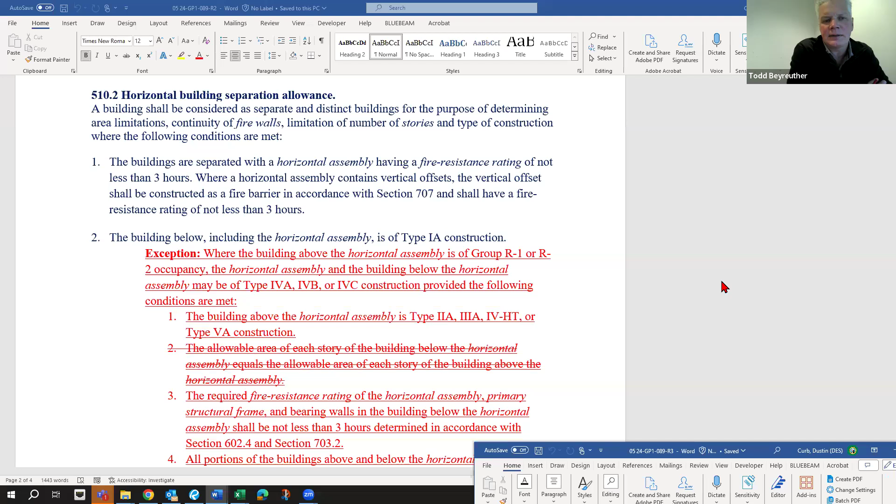So this one, if you remember, is the horizontal separation for considering mass timber podium, including the horizontal assembly. It started with type 4A, and then seeking feedback and conversation to help shape it. This version right here before the weekend was keeping open type 4A, 4B, and 4C. I think there was pretty strong opposition

against the B and the C consideration. The one that Dustin, if you have the revision, I just want to point out, the one we've been working on is 4A, and I'll just give my opinion. This is my subject matter expertise, this is all based on obviously the ad hoc Tallwood Building committee in 2015. We have the advantage of having at least one member that joins these meetings frequently.

The original fire testing was done with the old standard requirements that allowed heat delaminating resins in the polyurethanes. Part of the outcome of the 2015 testing that led to the 2021 code revisions was also to change the standard to require a non-heat delaminating resin.

There were additional questions, and we need as many data points as possible, still need more in fire. So there was additional testing in the last couple of years in Sweden called RISE. The changes that are part of the 2024 code, which we as state of Washington adopted in 2021 for type 4B, more exposure unprotected areas, were the result primarily of that testing.

This raises a further question: going beyond that, what if we allow some mass timber typologies in the podiums of the lower building, in what we call a horizontal separation of 510.2? Some changes to consider when this gets posted and discussed Thursday are whether this was a good recommendation, making it its own separate section rather than putting a bunch of exceptions into section 510.2.

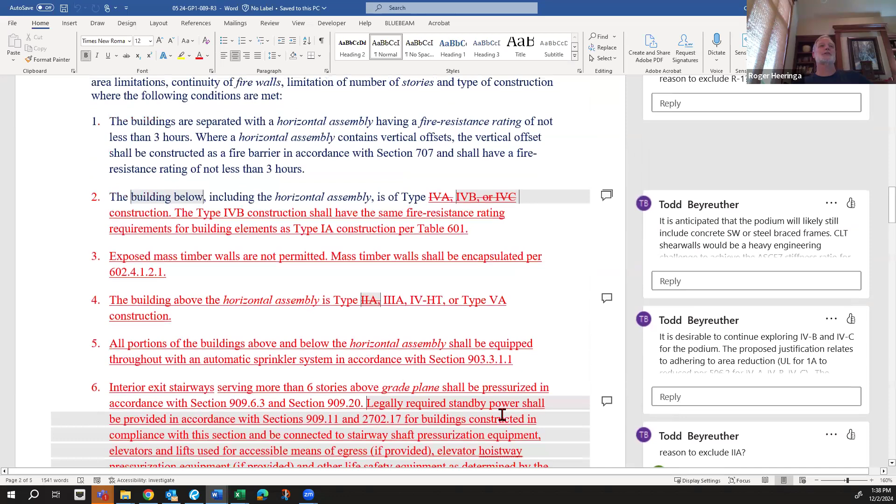So in the last proposal? Yeah, that's from the last. Okay, and I don't know that we've talked much about it. I don't remember. So I think that should be correlating - if we just did what was number 1, whatever the number was that we just passed, is there a correlation so that the description you have in number 6 corresponds to that? But that's all my comments.

Okay. John, you're perfect to go next. Thanks. Thank you.

As Todd mentioned, there was a group of us that met and sent some feedback to Todd and Joe just before the weekend. To summarize real quickly, the group that met included City of Seattle, myself, and one other person - I can't remember, there may have been one other person involved. Anyway, a couple other people.

But we were really concerned about extending this to type 4B and 4C. It's good to see that 4C is off the table, but we still have concerns about extending it to 4B. Understanding that some of the testing - I'll have to admit I have not had the chance to go through all the testing, like reading the RISE report in particular - I haven't had a chance to evaluate it all. But we felt 4A was pretty clear that was going to be okay.

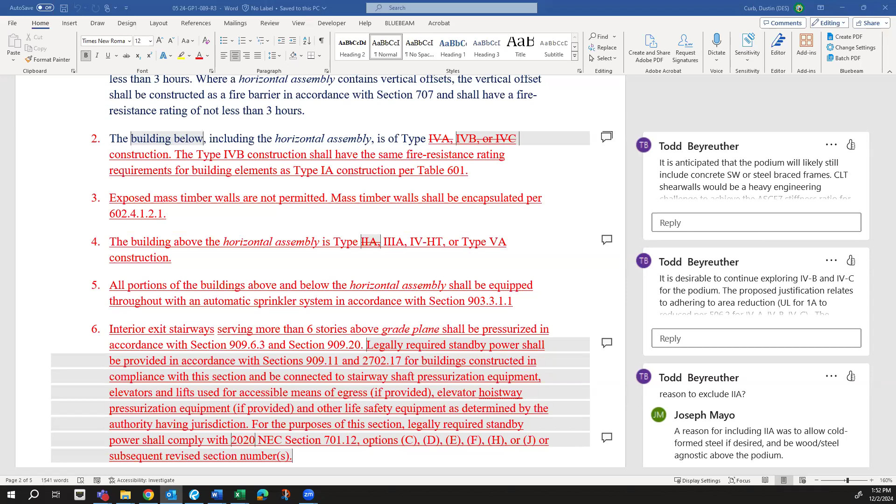Just in summary, this is essentially proposing mass timber floors and columns, no walls. It's recognized that most exterior walls and shear walls are not combustible. You still have to achieve the structural requirements, that would be an ASCE 7. So it's really going to, in my opinion, probably push it to concrete shear walls anyway.

But Joe, is there anything last? And then we probably should move on. Yeah, I think just highlighting that it is different than the other code proposal with limiting it to 85 feet or lower for the entire building, podium plus building on top. And then maybe just a bit of reflection that this is for Washington State, where we are in a mass timber ecosystem and one of the most advanced mass timber locations in North America. So it is in some way appropriate for this as a discussion, and that's part of the reason for bringing it up. I really appreciate all the discussion, so thank you for that.

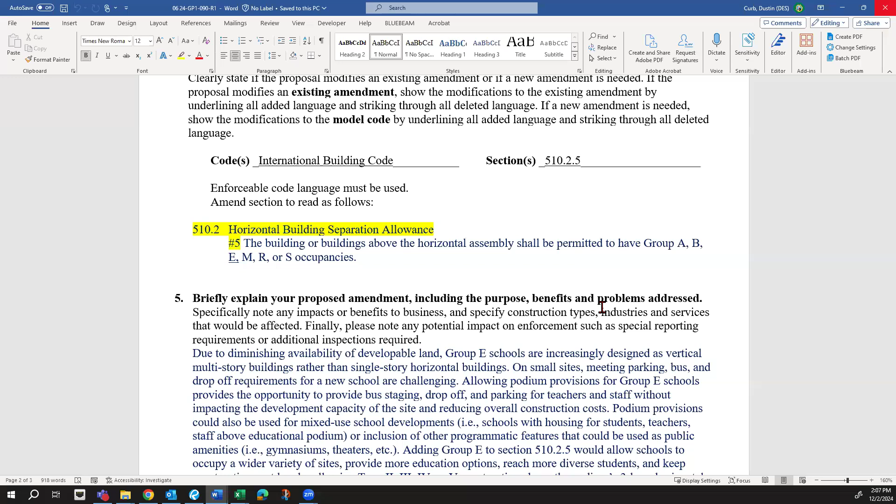So with that, I'll second, or let Joe withdraw. Thanks, Tim. I would appreciate it if you have time to send over some notes. I'd love to hear your thoughts on that to think about it more, but I don't think we need to further this one at this time.

So Joe, which would you prefer, to withdraw it or to vote? I'll withdraw it, yeah. Okay, Dustin, thank you, Joe. Is that appropriate, Dustin? Yes, sir. Okay, so instead of voting on the denial, we'll consider petition 090 withdrawn by the proponent. Thank you for that, Joe, and thank you, everyone.

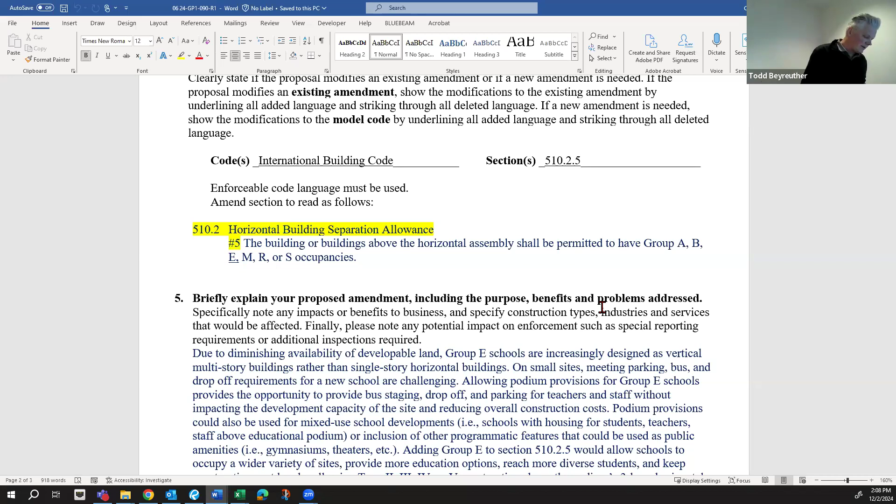Agenda item 7 is petition 115. We left this one from last week? I believe so. Let me check. Or was that further back? It might be further back.

I designed today's agenda to hit ones we haven't gone through very well. I try to put the ones we'll have a long conversation on towards the end, after ones we hadn't done already, and organize them so they flow through the text from beginning to end. So looking at our last meeting, let me get to it real quick. Does anyone remember? I thought maybe I'm just not remembering taking action on it.

I definitely remember. Todd, this is Eric, I can give a recap of what I know. Okay, thank you, Eric, that'd be great.

So a couple meetings ago at the building code tag, this was referred to the mechanical code tag. The mechanical code tag did review the language and moved it back to the building code tag without any recommended changes. I can't remember the exact motion made, but there were no changes, and they deferred final approval to the building code tag because it's under that committee at the ICC level. They did recommend including the same language in the mechanical code and the building code because they are duplicated sections in both codes.

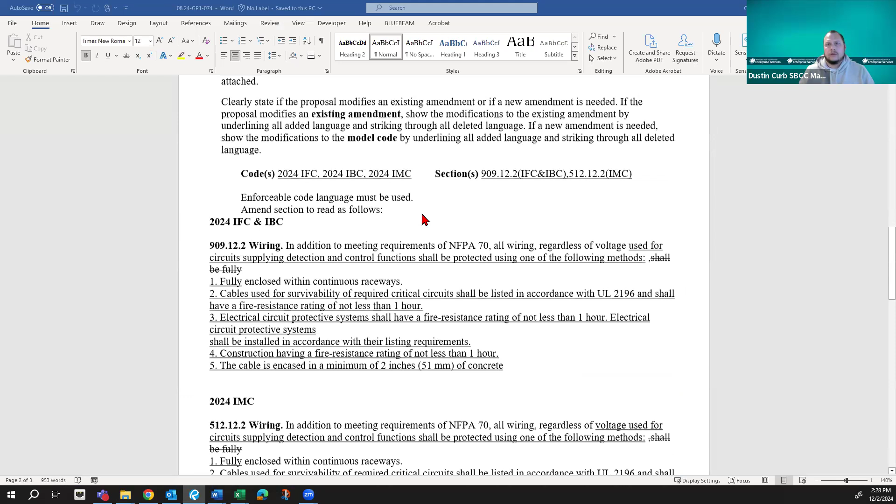All right, here's 074. What was this one? This one is David Mao. And this one is Dave here today. Nope, this one came back from the correlation committee as well. Let me get to my notes on that.

So it looks like at the November 19th correlation meeting, this one was reviewed, and the work group was okay with the proposal language and did not have any suggested revisions. So this one was heard by this group. Let me pull that note up. We did, I believe, hear this one once before sending it out to the correlation group.

Like Dustin, did you say you're pulling up? Yeah, I was just looking to see. We first discussed this one October 24th and deferred it to the correlation meeting to see if there's anything else to come out of it. So correlation group reviewed it on the 19th and didn't make any changes, and so we're back here with no modifications to what we've seen in the past on this one.

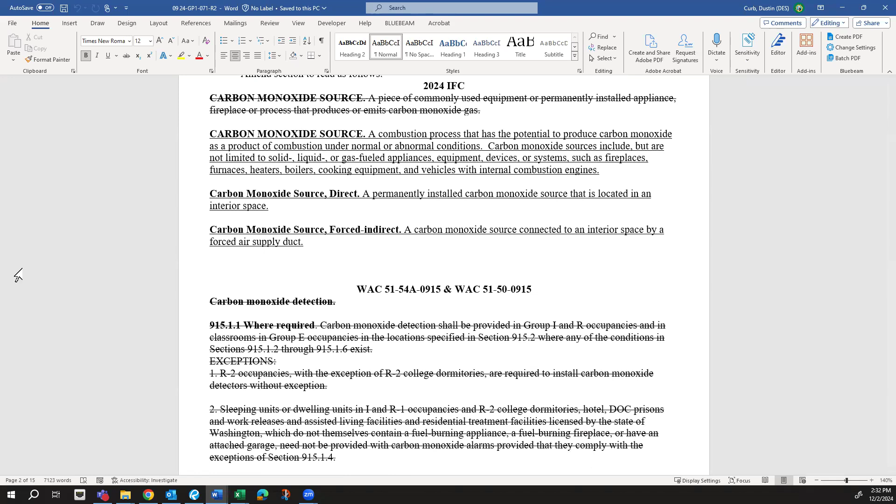Yeah, go ahead, Hoyt. This is just real quick. One of the things is 915.1. It says new and existing buildings shall be provided. Is this also in the existing building code?

That I do not know. Because usually I thought this, unless I'm in the wrong section. Am I in the fire? Oh, I'm in the IFC. Never mind. I wonder, yeah, that's probably why. Never mind. I'm sorry, I was in the wrong one. Forget what I was saying. If the IFC, if the fire code's written that way, then that's fine.

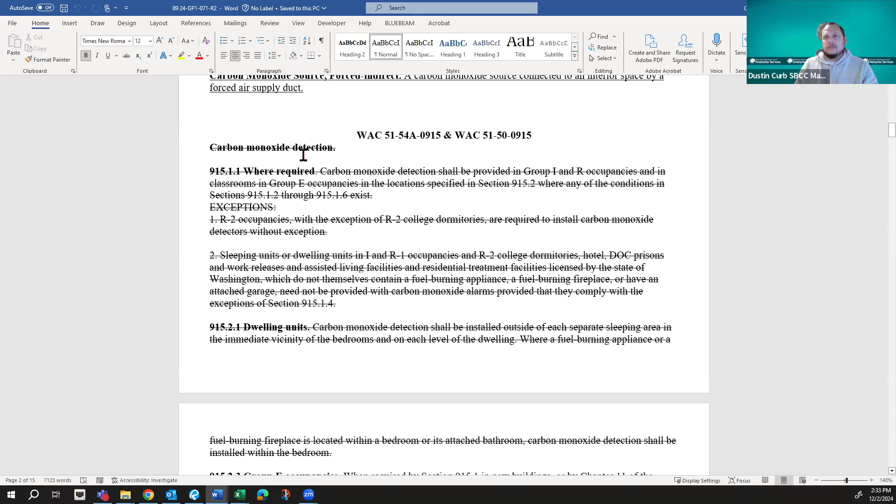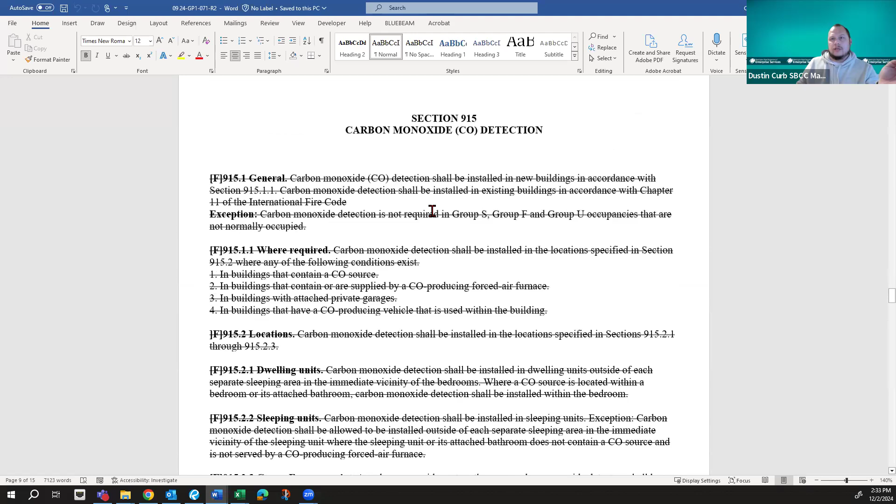Yeah, the only thing is when I look at 915.1, where it says new and existing buildings, all I'm concerned about, if you're in the IEBC, will you still get here? If the fire code's catching it, then that's fine. But typically, in my experience, a lot of times they use the full existing building code, and sometimes they're able to not get to this section. Maybe someone else knows off the top of their head.

That was something I didn't get to review this one, I apologize, I didn't have time. But as long as you're definitely going to get to this somehow, then that's fine. And it's in parentheses fire, so it's probably just through the fire in the fire code. But does anyone else know on this call if you're going to get that for sure too in existing buildings?

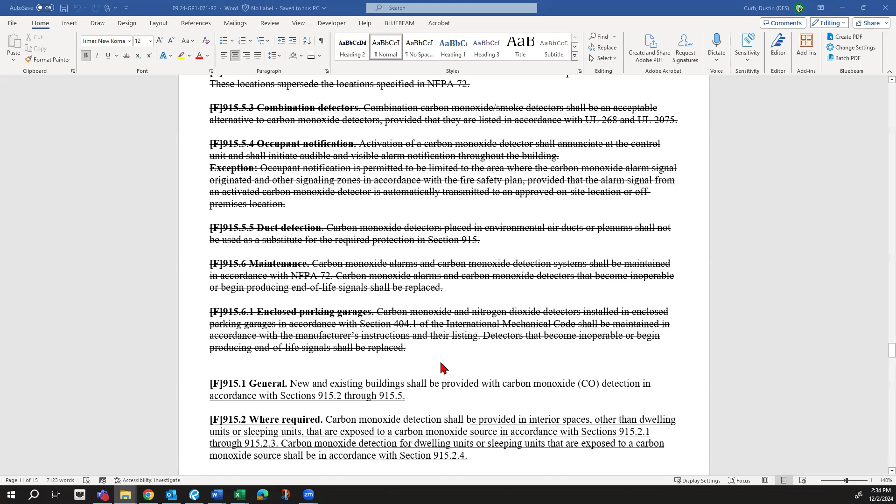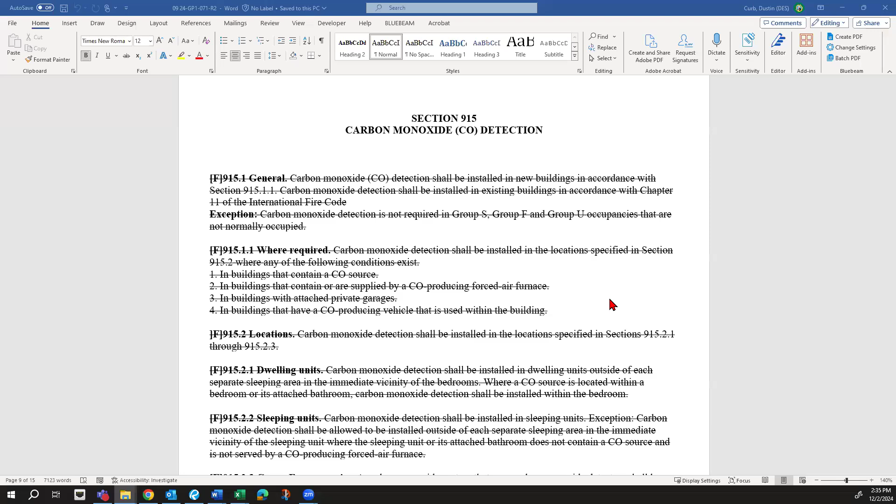Go ahead, Tim. Dustin, do you mind scrolling up to the strikeout for the IBC for 915.1? Yes. And then what that's replaced with in the IBC, not the IFC. This one here.

So there is that change that Hoyt is mentioning. The original code is for new buildings. I don't see really a problem with the language. I'd just say that the pointer from the existing building code will usually point you here when you have to be in compliance with the IBC for life safety systems. So you would go here and then it would have this new and existing buildings. But this wouldn't be the charging language ever to get you from the EBC to the IBC, so I don't think there should be a correlation problem.

And that's fine, that's fine. I just wanted to ask that question because I actually did not review this one, I apologize, so I'm doing this on the fly. Jon? Yeah, somewhat related to what Hoyt and Tim were talking about — does anyone else read this as being a retroactive provision?

Because I think relevant to what they're saying, the IEBC has triggers - when do you trigger new work versus other work. The way this is written, and the reason I think the original language referred to Chapter 11 of the IFC, is because that's where the retroactive provisions show up. So if you have a building and you want something retroactive, you throw it in the IFC anyway. This here appears to make it the building official's retroactive requirement, so anytime it comes to them, you force the work. That's kind of the way I read it, but others may read it differently.

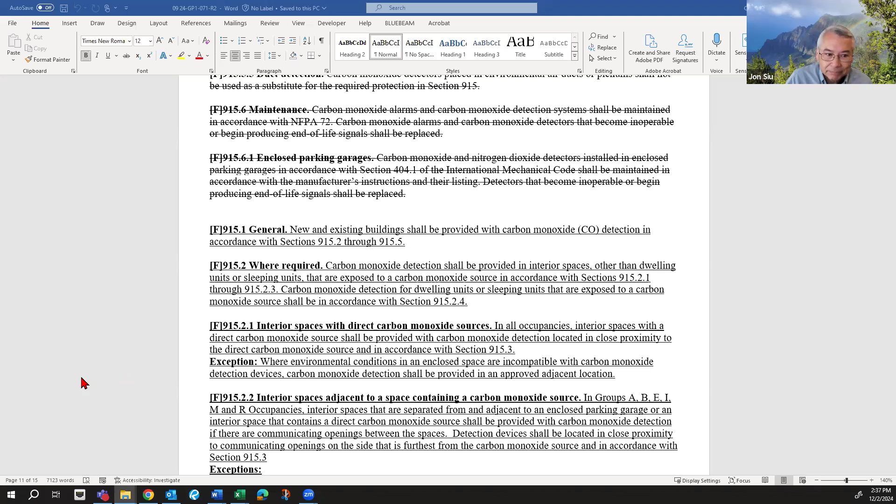Okay, Micah? I read it the same way, Jon, as a retroactive item. This is a really quick review of the IEBC, but I'm not even seeing, under level 3 alteration, that it triggers to this section either. So I agree with you, that's a retroactive item and that should be changed.

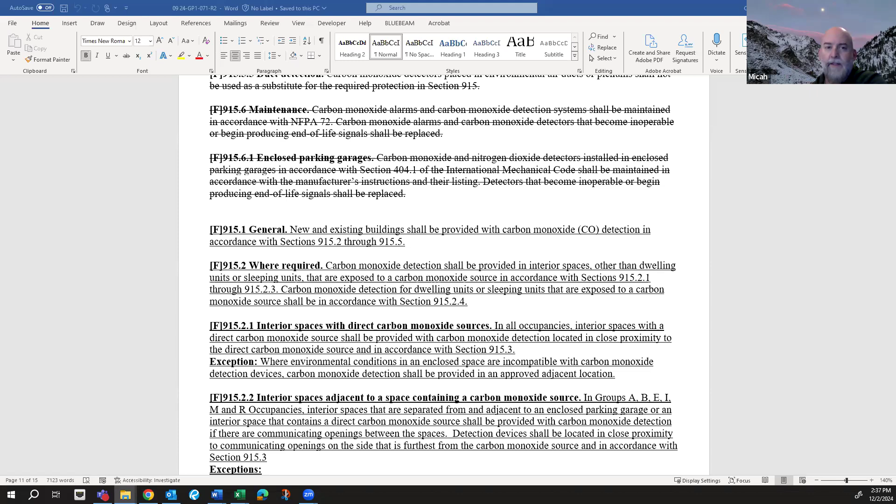The other thing I had a concern with, and again I had really short notice to look at this, is under the definition - Dustin, if you wouldn't mind scrolling up - it talks about the carbon monoxide source definition as product of combustion under normal or abnormal conditions. Would there be any other conditions besides those two? Wouldn't it just be a product of combustion? That seems like a strange addition to a definition - what does that mean? My recommendation would be to strike 'under normal, abnormal conditions' from the definition; you'd still get an accurate definition. But again, this isn't my proposal, and Ken's not here for me to ask him. I can probably send him a message though.

Yeah, go ahead Mike. Thank you, Micah. Yeah, I'm having some of the same concerns, and I'm not exactly sure why they struck everything and then redid it - it makes the review of the entire package a little difficult. I don't know what I'm missing here, but I feel like something is off, maybe that's just me in the way I write or read this. But I'm also seeing things like what Micah brought up, the normal and abnormal conditions - we need carbon monoxide detection not just when there's sources and fixtures and gas appliances, but when somebody drags their charcoal grill into their house to add some heat. I apologize because I haven't spent the time necessary to really review this side by side, but I think there are some concerns there.

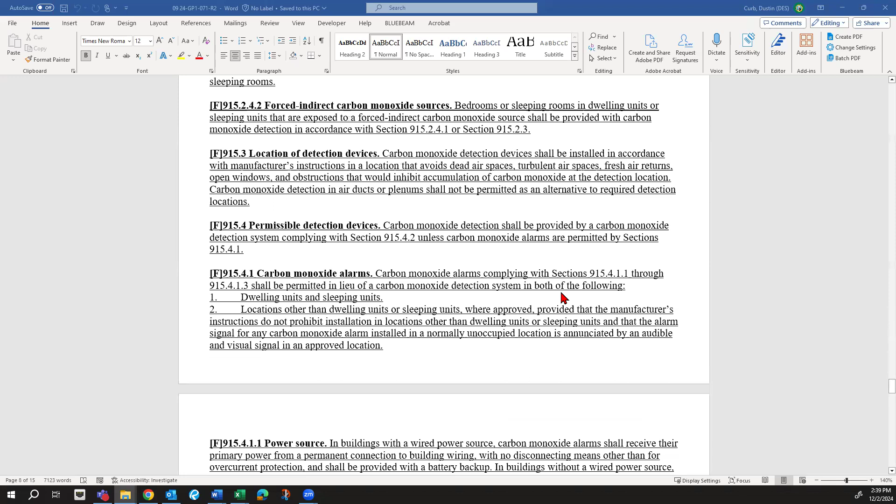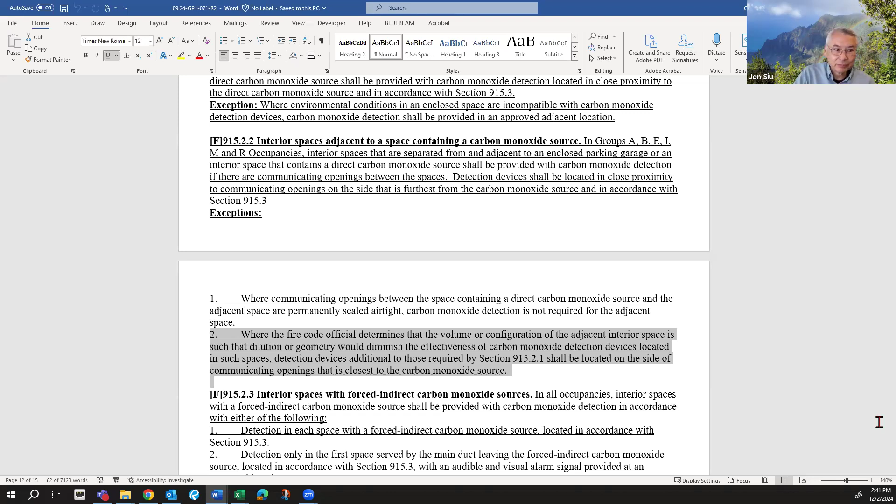Go ahead, Jon. Sorry, one more additional question for Ken when he comes back and you guys discuss this again - if you look at 915.2.2 on the building code side, there's exception 2. This essentially says it's something the fire code official decides, not the building code official - so who's got the authority? Should this just be in the fire code? It seems weird to say you have to go ask the fire code official what they decide on this particular issue. I agree, that does seem strange, Jon, especially when you look at the hierarchy of the codes - except for safety or the more strict, the fire code official usually has the last word.

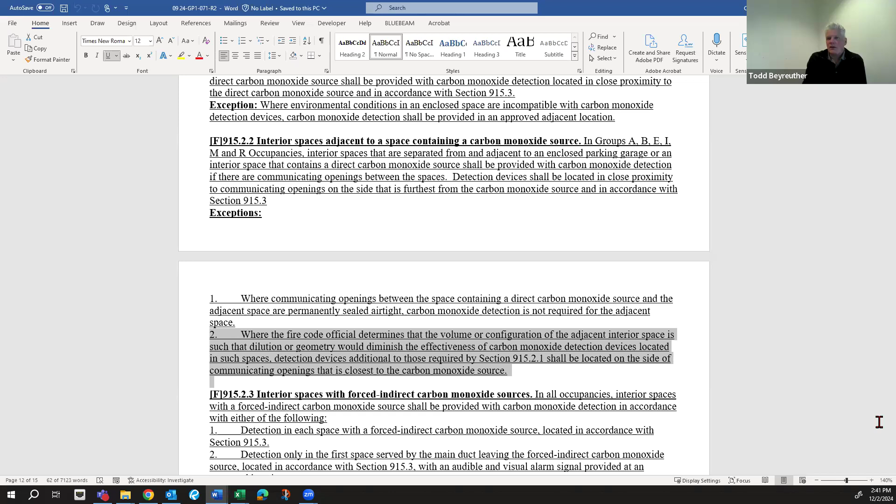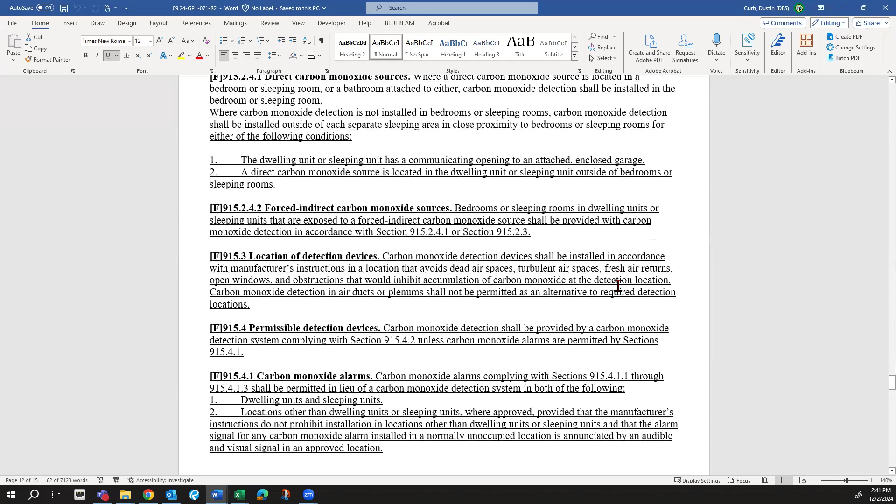Okay, wait, yeah, I could just be remembering wrong. Can you scroll down a little farther to 4.2.3? Did the occupant load change from 30 to 50? Am I just missing that, or right here?

What was his rationale for going with that? I don't remember, I apologize. The same thing, holiday times, they had a hard time. I'm trying to figure out if that actually was a change in the national code. I just don't remember. I don't know why I wouldn't just stay at 30.

So this is to correlate it to the Washington State provisions that currently exist as a modification. So this was basically the only change I believe Ken made from the national model, was to correlate it with Washington State's, correct, to coordinate with the WAC. Yeah, I thought the WAC was going to change back to 30, but I could be remembering wrong. Okay, if it's staying at 50, then that's fine.

So do we want the Ken pathway here? I'd make a motion to table this and see if we can get Ken to speak to it more at a future meeting. Second, is that Lance? Yeah, okay, so moved and seconded to table. Any other discussion? All those in favor signify by saying aye. Aye, aye, aye, aye. Any opposed? Okay, so then this is 071, table for Ken feedback.

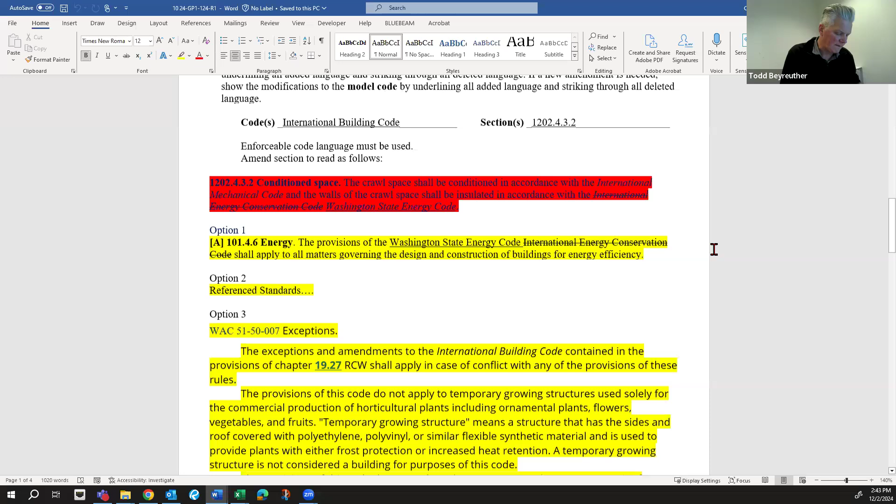See if we can clear the side of the page. This is a Joe Mayo proposal for conditioned space. Oh geez, I apologize everyone, I was not prepared for this one. How do we... can we help out at all here, Joe? Yeah, this one, I might be able to clear it up a little bit.

So we talked about this at the correlation meeting on the 25th, as far as whether or not we should be citing the Washington State Energy Code or Washington custom codes across all the different codes. Not so much at the correlation group for this particular code section, but just in general where we should be doing that. So the discussion kind of ended up that we have the preface sections in the beginnings of our code books that are copied from the first couple WAC sections of each different code. And in there it names specifically the codes, and the only code that we have specifically named as a Washington code is the State Energy Code. And so I think the consensus at the correlation group was to leave this stuff in the preface section so that we don't have the code maintenance issue that arises if we have this all across the code.

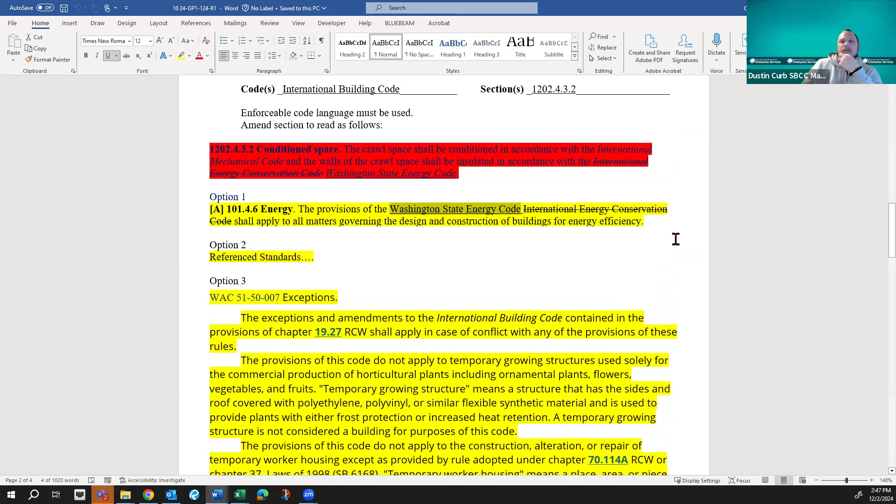Which code proposed change was discussed? I mean, theoretically, there should be one code change proposal that moves forward that clarifies all of that in the preface. And then any other of these could be denied, right? Right. So here what we see, we do have the 3 options for where this could be included: option 1 in chapter 1, option 2 in the reference standards, and option 3, which would be the status quo, which wouldn't require us to actually do anything. So if the will of the council and the tags is to keep it in the preface sections, the proposal is not needed, and we can withdraw the proposal, and option 3 will be what occurs as a matter of course, without any changes needing to be made.

So if we were looking for movement on this one, it would be a motion to deny adoption into option 1, or we can just withdraw the proposal if that's okay by Joe. I just think, at that meeting, let's hear back from Dirk on what's the best way. And if that is to put it in chapter 1, I do want to make sure that we still have a proposal open that would make the change in chapter 1.

So I would suggest maybe that we postpone this one too, and we hear back from Dirk. I mean, it is one issue, and I think there may be 1 or 2. Again, I don't remember which code change proposal was talked about. I don't think it was this one at the correlation committee. I think it was another one that came up somewhere else. I could be wrong, but.

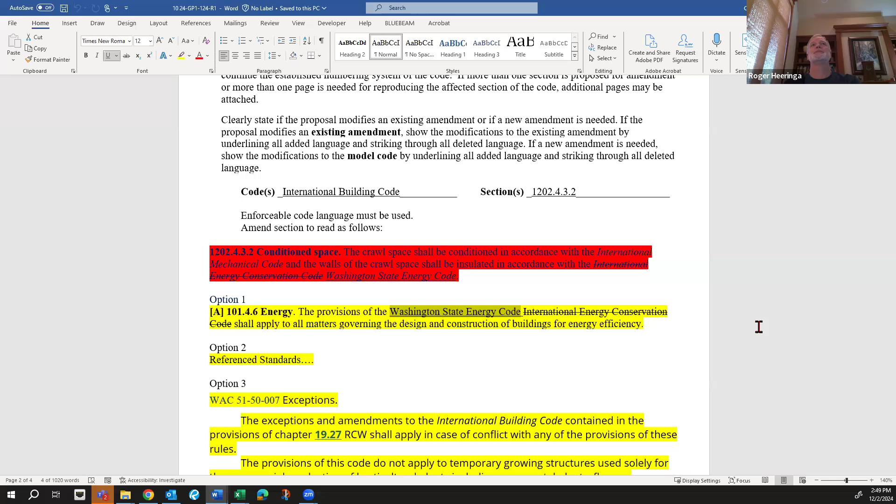Thanks, I kind of struggle with option 3 here and how that's relevant. It seems like the relevant WAC would be 51-04-015 that talks about definitions, including the definition of model codes and state building codes. And it is specific to, the state building code means adopted by and referenced in chapter 19.27, the state energy code, and any other code so designated by the Washington State Legislature as adopted and amended by the council. So again, if option 3 is relevant, then I think we should have an option 4, which references WAC 51-04-015.

Thanks. Just on that one, since we're working on the building codes and not the 5104, I'd need to double check with Dirk to see if that one's something we have to do anything special on to open it up. So we can keep this one open. I can get the conversation going with Dirk on this, and maybe we can provide an option 4.

I think that this particular proposal is taking on a little bit of a different life since it was first drafted to be intended only for the building code, whereas now we're looking at all codes and how we're naming them across there. So if we want to table it till this Thursday, I can have the conversation with Dirk on naming of the codes and where it's best appropriate, and then also follow up with him to see if there's anything special we need to do to open up 5104 for rulemaking at this point. So because we don't have a CR-101 on file for that WAC.

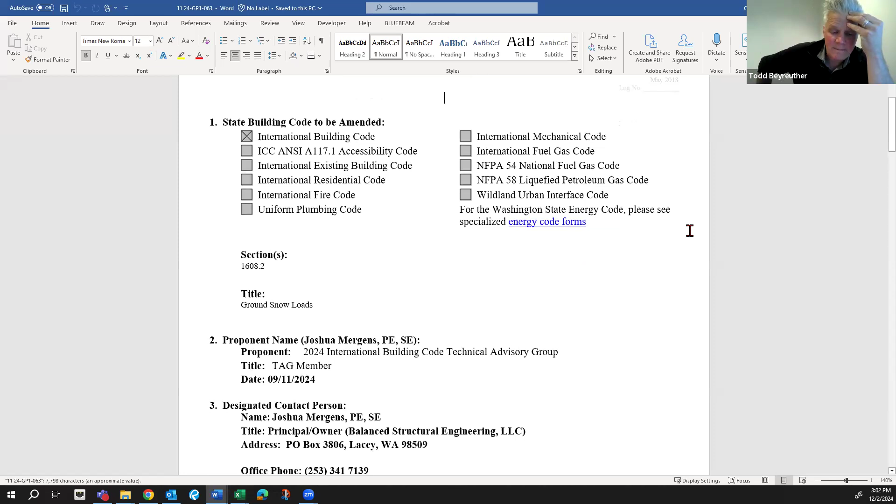Okay, let's move forward. Agenda item 11 is petition 063. Josh, you were gonna pick this one up? Yeah, absolutely. I'll just start out, and I know we're trying to move quick here, so I'll try to move quick through this as well.

We had tabled this because there was the opportunity to have more discussion with ASCE and some other folks within the industry. There's actually been quite a bit of discussion in the background, so I'm hoping I can take maybe just 5 or 7 minutes to catch folks up on what we were looking at, what we've since learned. The conclusion is this proposal is going to need to be revised no matter what, based on the new information we have. But I want to understand from the tag how we want to collectively handle this so that I can get something on Thursday to look at.

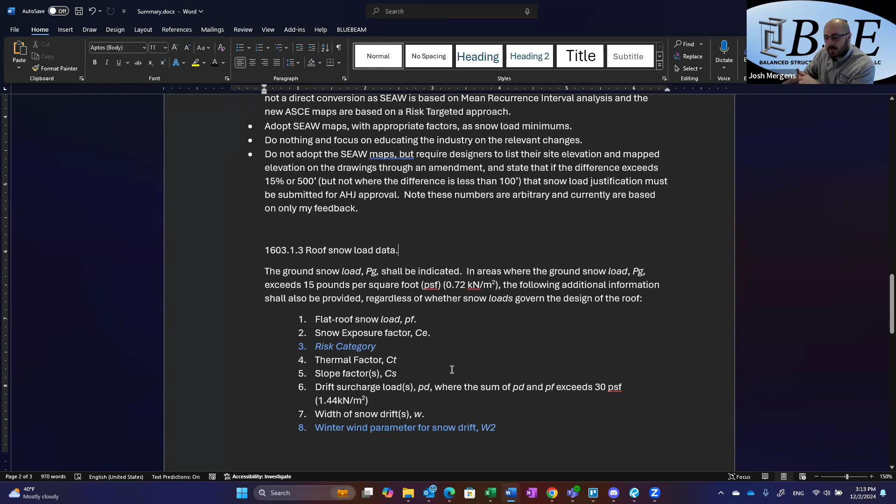Those exact numbers are placeholder and open for discussion, but that's where I'd like to take it if we had more time. I do have some proposed language, but it seems like that probably wouldn't be appropriate right now. We should maybe open to some conversation so we can get the best information here and keep moving on with our agenda.

Josh, do you have the language right below here? I do have some language—yeah, I'd love to show you guys here. So first is in 1603.1.3, which states which snow load data you need to include on your drawings for structural drawings specifically: simply adding site elevation above sea level and mapped elevation from the ASCE 7 hazards tool or equivalent geodatabase.

And then the second component is in the ground snow load section of chapter 16, which states you go to the ASCE to get all these loads. But it adds that snow load justification shall be submitted to the building official for approval where site elevation above sea level and the mapped elevation from the ASCE 7 hazards tool or equivalent geodatabase differ by more than the maximum of 15% of the site elevation above sea level or 500 feet, with an exception that differences of less than 100 feet shall not require additional justification unless determined necessary by the building official.

There was one added piece I want to talk about, but let me pause here. Can you clarify the white and blue? I know the green is what you're proposing, but what's the white and blue?

This is just the color coding from the original IBC language—they have blue for new in the 2024 code. So this is from the 2024 version with blue as new. I'm only proposing the green underline here, no strikeouts needed, none of that.

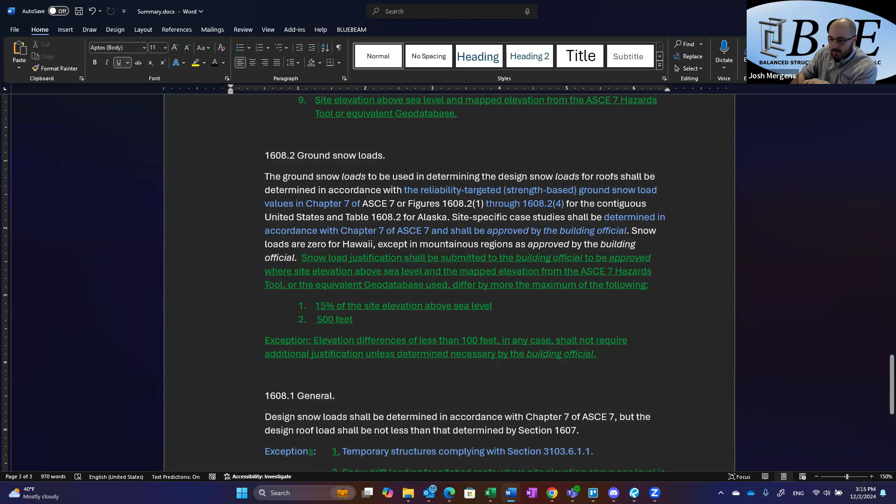This latter piece I'd like to hang onto and open up for conversation, since I've thrown a lot of information out there. Hey Hoyt, do you want to jump in?

Just a couple things—I know we're doing this for the IBC, and it's easy to use that stuff, but we also have the IRC for this. Jurisdictions have to do table 301 and are required to publish that. I assume the jurisdiction would have to go in here and look at their worst case scenario, and that's what they'd publish in table 301. Or is that how you're thinking it would be?

I don't think it would be much different than the current SEAW maps in that regard. I think it's definitely an important point, and there's some guidance about how to convert to PG ASD, so at least the conversion's covered. But Hoyt, what I think you're getting at is, okay, I'm the AHJ and someone says fill out this table—where do I grab this number from?

I think it's a similar challenge that currently exists in areas with varying snow loads. For example, Tacoma, Olympia, Seattle—this isn't too much of a challenge, since we know our snow loads for essentially all those low-lying areas. But if you're in Ellensburg, a lot of Kittitas County, or Spokane County, this can vary a lot. Most of those jurisdictions have put out a map they've been using for general snow, and in their IRC table they make reference that this is the minimum snow, but you're going to have to look at map data because you can't do a one-size-fits-all in a lot of jurisdictions. I don't know if that resolves the issue or if we're creating another challenge, but I'm definitely interested in hearing more.

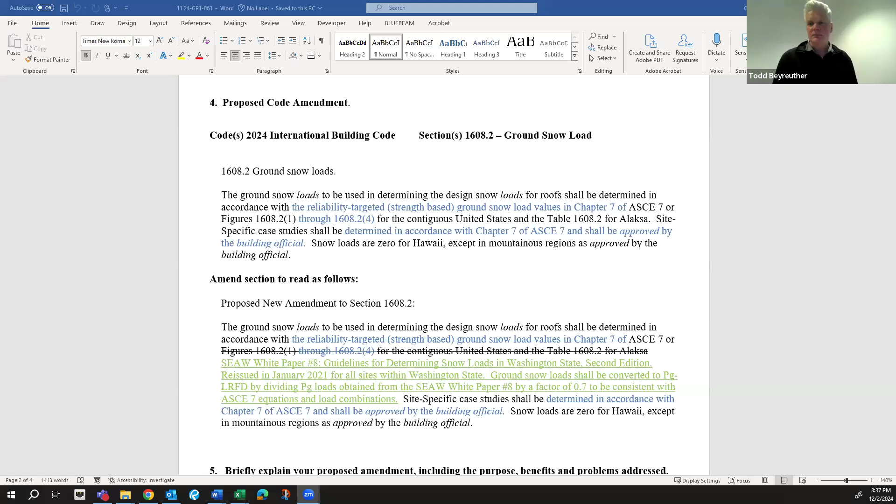Do we have to make a motion on that, or can we just table it? Yeah, well, we didn't address it in the agenda. Maybe just quickly make a motion, please. I make a motion to table it till Thursday. Thanks, Hoyt. Second, this is Tim. Thank you, Tim. All those in favor signify by saying aye. Aye. Any opposed? Okay, with that, 133 is tabled till Thursday.

I'm not a parliamentarian, but if you needed to do number 12, do you also need a motion to postpone 089 or 063? Yeah, if I confused everyone, I jumped right ahead to 133. You're right. What did people think they voted on? Let's start over. Let's go back to agenda item 11.

Thank you, Roger. 063 is over, just talking about ground snow loads. Let's entertain a motion to table that. So it didn't get moved, which created confusion. Josh, okay, thanks, Josh. Second. Hoyt, was that you? Yeah, I second it. Okay, thank you. So that's a motion and second for the ground snow loads, 063. All those in favor signify by saying aye. Aye. Any opposed? Okay, so 063 is tabled, and then do we want to do 133 just real quickly, or did you understand what you were voting on there?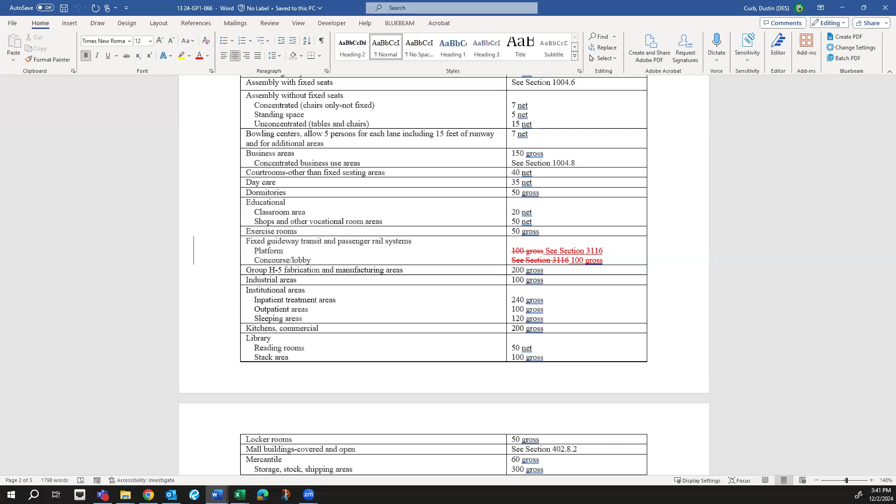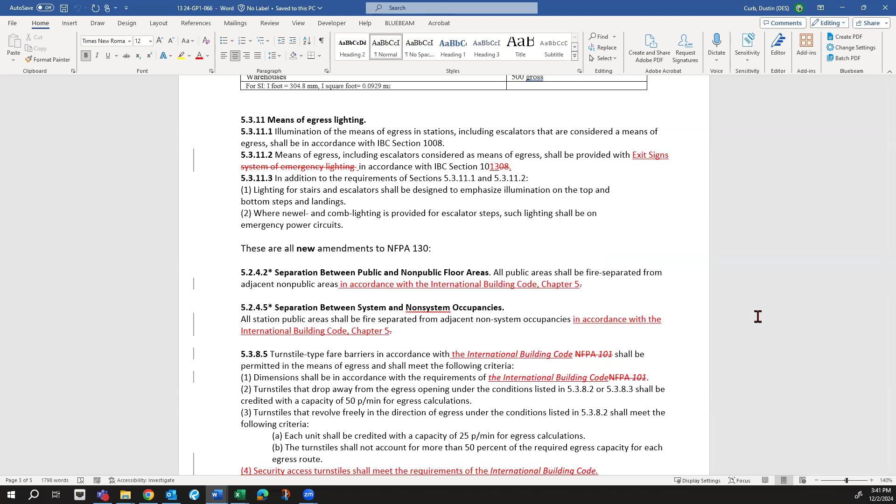Let me give a little background to this standard. It's interesting, specific to light rail. This standard is adopted by the building code and by the fire code, but the standard itself refers back to building code subject matter. And when it does that, rather than referring back to the building code, it refers to NFPA 101. So we end up with particular aspects of the code being in the building code and in NFPA 101 being adopted, which sometimes creates conflict and confusion for designers and plan reviewers. So our intention with a lot of this cleanup work is to have the standard language point back to the IBC rather than NFPA 101.

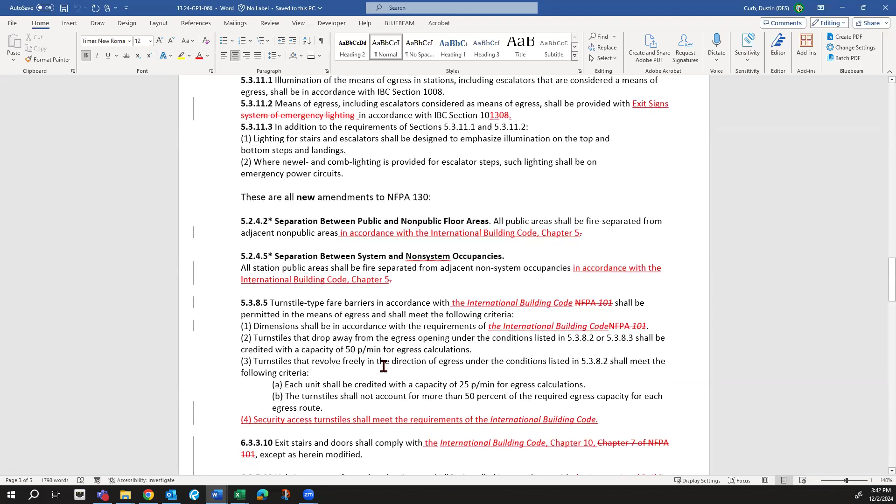Does that make sense? NFPA standards never refer to the building code; they always refer to NFPA 101 where they have to talk about building code subject matter. So that's why it's there. The first item on top is a clarification - actually another typo. I can't remember if the building code changed, but it referred to 1008 and the correct citation for exit signs is 1013. So that's a quick cleanup there. The next item down - stop me if there are questions - requires a separation between public and non-public floor areas of a light rail station.

It doesn't clarify the details of how you do that. It leaves it kind of open, so it's really subject to interpretation. Our intention here is to refer back to the International Building Code, Chapter 5, which everyone's familiar with, with respect to how to separate public and non-public areas.

Hey Mark, do you have a couple of questions from Hoyt and John? Is that okay? Yeah, go ahead.

One question, I was going through and reviewing this, but some of them, like the turnstile, for example, those sections 5.3.8.2 and 5.3, those all come from NFPA, right? Those aren't in NFPA 101. A lot of the references that I read through there, I didn't see how it was like for dimensions in accordance to requirements of International Building Code for a turnstile type fare barrier. I don't believe that's in the International Building Code that I remember, and I apologize, I didn't go through and look at this stuff.

Hopefully you did. I thought this was in NFPA 101. Security access turnstiles were added to the IBC, I think two cycles ago. Oh, okay, sorry about that. Yeah, they're in there now, and it's a great option for if we end up using it.

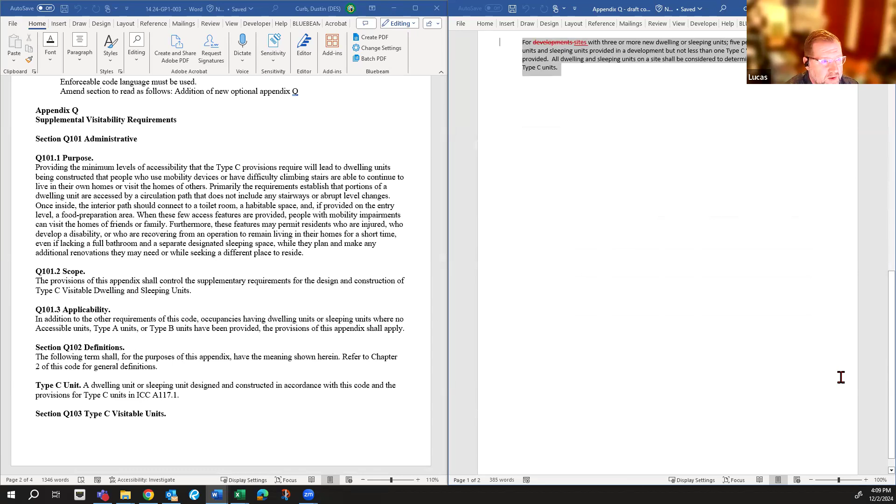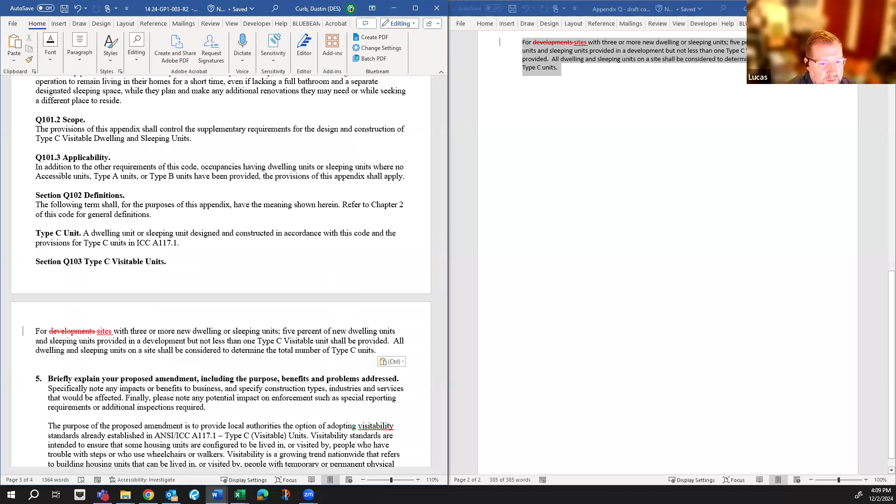And from our department's review and from the advice we got from State Building Code Council, various tags, it kind of led us to the same sort of advice, which is Type C visitable units are very close to accessibility. It's sort of a no-no for a local jurisdiction to try to make any kind of amendments to accessibility. It was the advice at that time that rather than have a jurisdiction get out ahead of the state building code or get in conflict with it, in order to be able to adopt those Type C standards from the ANSI, one ought to do a state building code amendment proposal. And so that's what this is.

Right now, the Type C visitable unit standards already exist. They're in the ANSI and they've been there for a few code cycles now. There just isn't any applicability language or charging language to get you there. So that's essentially what this is. It's structured as an appendix.

That way we recognize there's pressure on us as jurisdictions to adopt inclusive housing regulations and to try to get this kind of stuff. But we recognize that not all jurisdictions may be under the same pressure, and there's a lot of different dynamics there. So as an optional appendix, a jurisdiction could adopt this.

So we talked about this a week or two ago, and the TAG has suggested a little bit of clarifying language concerning this one being an optional appendix. So you can see there as underlined and strikethrough the change that I made there under the purpose statement, just pointing out that it's optional.

The language above that, if you could scroll up just a little bit there, Dustin, the missing language is actually there, so it's not missing. Front and center there: the provisions contained in this appendix are not mandatory unless specifically referenced in the adopting ordinance. That was something the TAG had suggested.

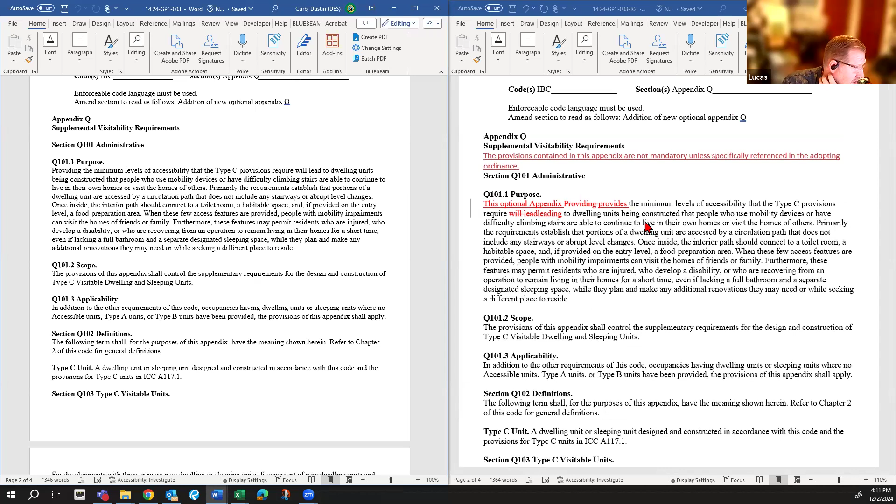And then at the very end of this section, we clarified that this would apply to sites rather than developments. That's consistent with the language used in the building code for Type A units as well. A Type A unit is required whenever you have more than 20 units on a site. So we've adopted the term site rather than developments.

So again, just to conclude, this is merely to get some applicability for a Type C unit. That applicability is when you have 3 or more units on a site where you do not already have Type A and B units.

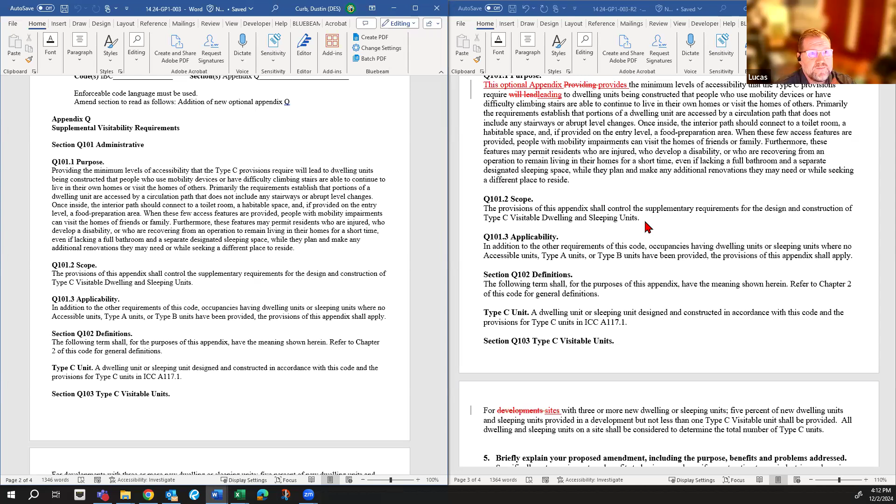Okay, thank you. Tim?

Yeah, I believe I made the motion to table this and provided the guidance on adding that sentence at the top, which I appreciate, and I appreciate you bringing this back. I like the sites provisions below.

I remember as a portion of our conversation, there were some comments that you wanted it to be developed or developments, meaning even if they separated each house onto its own lot, they would still have to provide this. But this at least gives very clear, enforceable language. So if you're comfortable moving forward with it as sites, I like the changes and would definitely be recommending for approval to full council.

Thank you, Tim. Roger, is that a motion or not? Not a motion, I wanted to give everybody a chance to say something. Go ahead, Roger. Yeah, I don't have anything that was going to impact Tim's potential motion.

I just wanted to let everybody know there are 3 proposals that are calling for an Appendix Q. So if they move forward, just so everybody's aware, there's going to have to be some coordination there if 1, 2, or 3 pass. And then can you page up to the top?

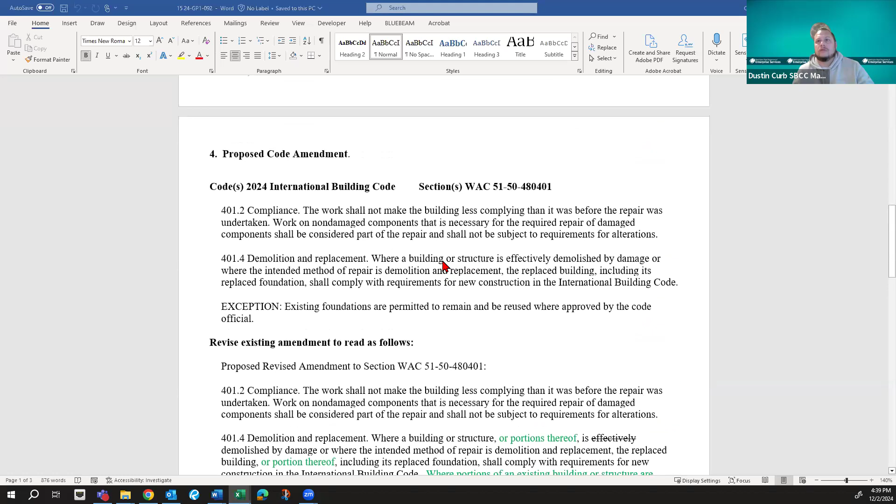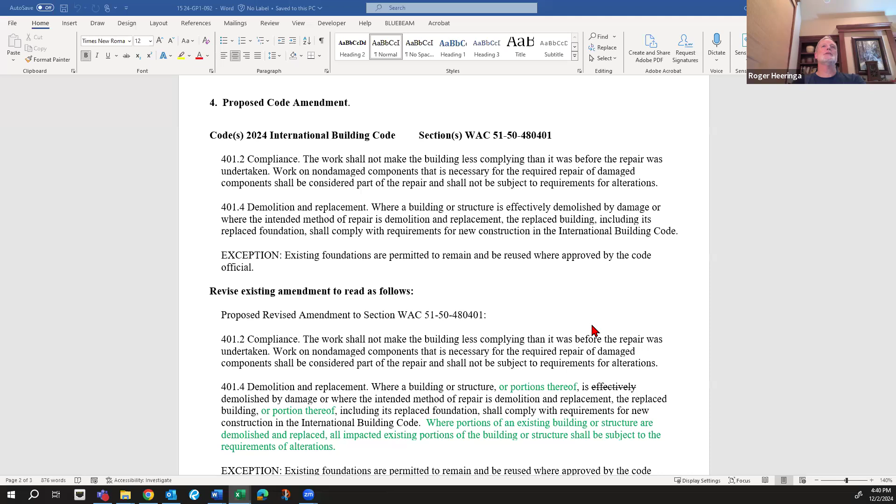Dustin, I've read through it, and I think that this is one that just came out of our review of the changes to the code and the update. But I do have questions, because in the proposal he's got 401.2 in both the code and the WAC, and those appear to be correct - the 2024 IBC is exactly what 401.2 shows there. I also believe, and I maybe should pull up the WAC on 401.2, but those two both seem to be like we wouldn't need to make any changes to either the WAC or the model code.

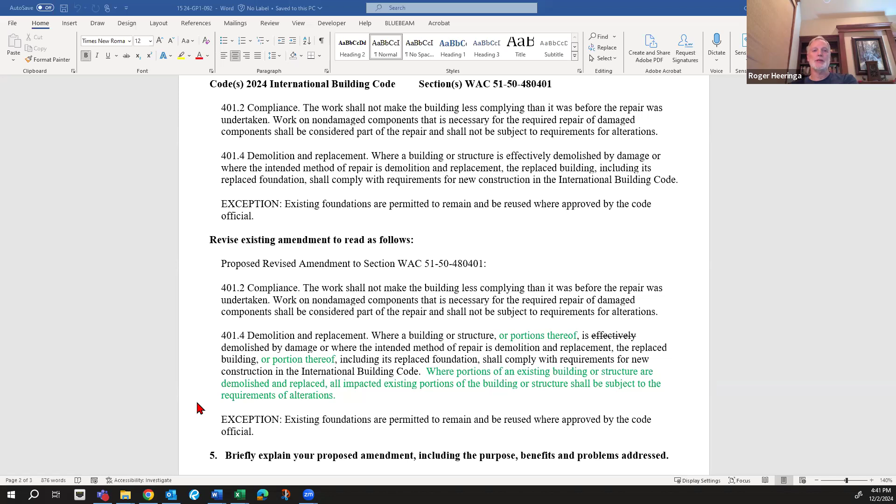401.4 is an addition to the IBC, and the edits shown in 401.4 in green are the proposal to update the WAC. But that's just from my study here, trying to look ahead. So I don't feel able to be an expert and say exactly what the proposal was, but I was pretty sure this came just from our initial review of code changes.

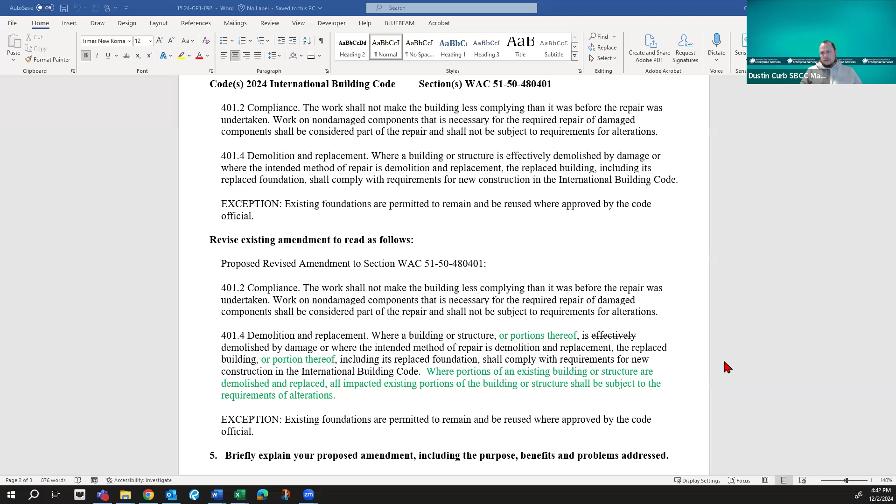Recollecting back, I feel like we talked a lot about this word 'effectively' being included in the current WAC for 401.4. And then I think that the stuff in green is a little bit additive, but it's there to remove 'effectively' and clarify the language in there. So I guess without Josh here to talk about what's drafted, I don't have a good clue on some of the reasoning here. I read through it and looked through it.

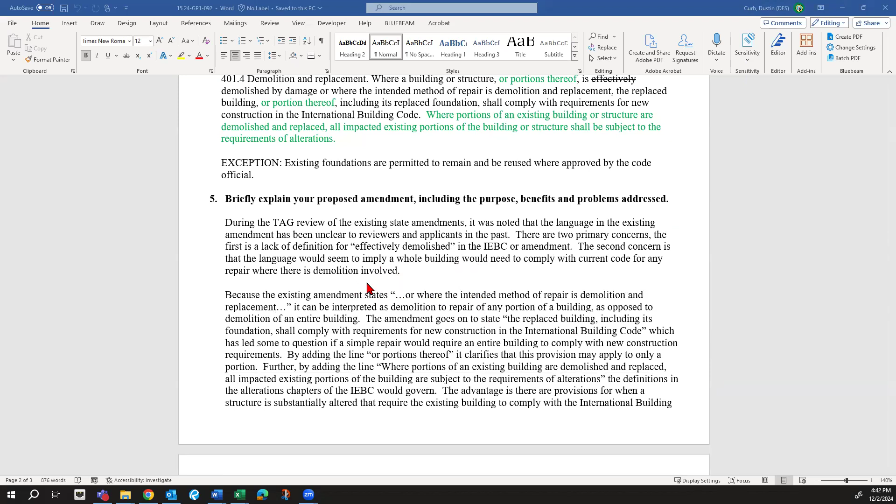The one thing - look at the code, the explanation, basically what he did is he put it into code language. 'Effectively demolish' is a very arbitrary word. So what this actually does is put it in code language where it says a portion thereof is demolished or damaged. So basically, what is 'effectively demolished'? It's kind of a non-defined term. This actually puts it more into code language and tells you what to do when that existing building gets stuck.

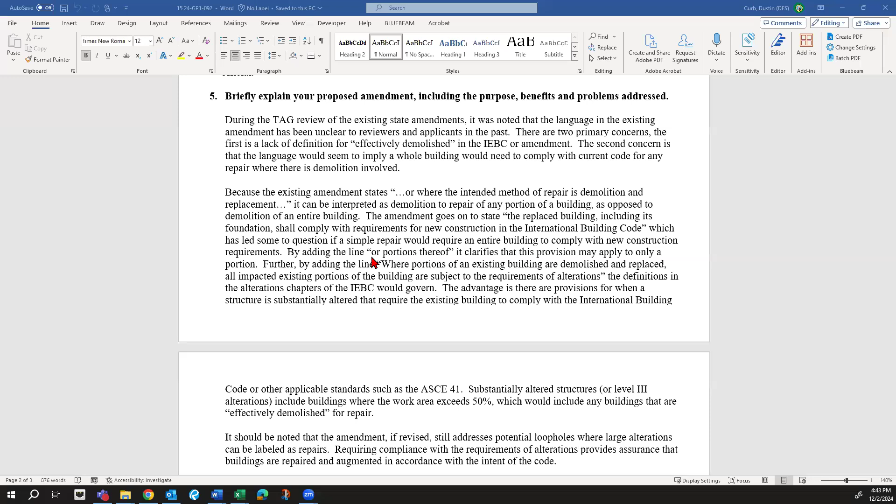To me this seems very easy, I don't know if we need him to talk about it. I was willing to make a motion to approve this to the full council or whatever, because 'effectively demolish' - what is that? He defined it better up in the actual language, and that's what I work with. ASCE 41 is what I deal with all the time for structural requirements - that's where you get into the structural requirements, if you're not familiar with that.

I'm hoping we could do this one. This to me seems like a very easy thing to approve. I'm sorry, I'm speaking for him though. Is that your motion? Roger, you want to speak first? Yeah - oh, go ahead, someone. No, go ahead, you can make a motion, right? Oh, I'd make a motion to move this to the full council. Okay.

I don't know, Todd, if I'm an alternate. I don't think I can second. Oh, you better not. I don't know.

John? Yeah. Well, are we discussing this if it hasn't been seconded? It's okay, you can still consider a question in discussion.

Yeah, I got a little bit of a question reading that, and reading it several times. So we've changed it from if a portion thereof of the building has been demolished by damage, then everything complies with new construction. But the second part that he's added is where portions of an existing building are demolished and replaced, you comply with the requirements for alterations. And I'm not certain I understand how to apply that.